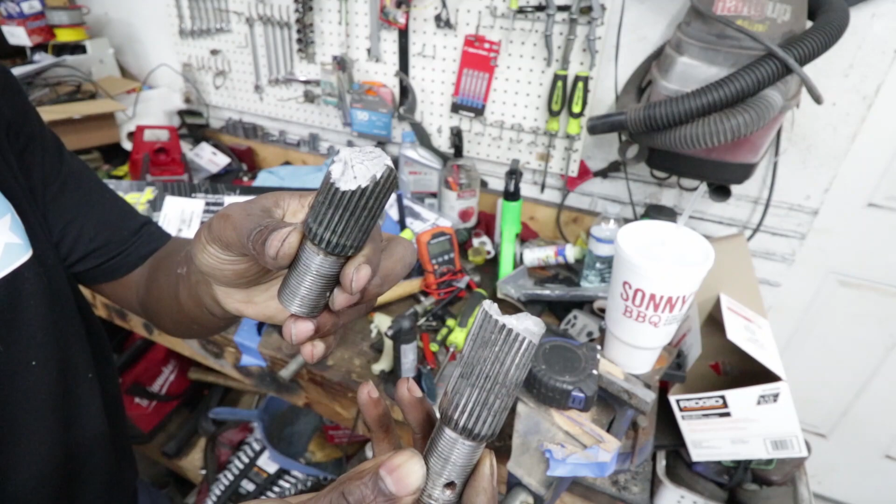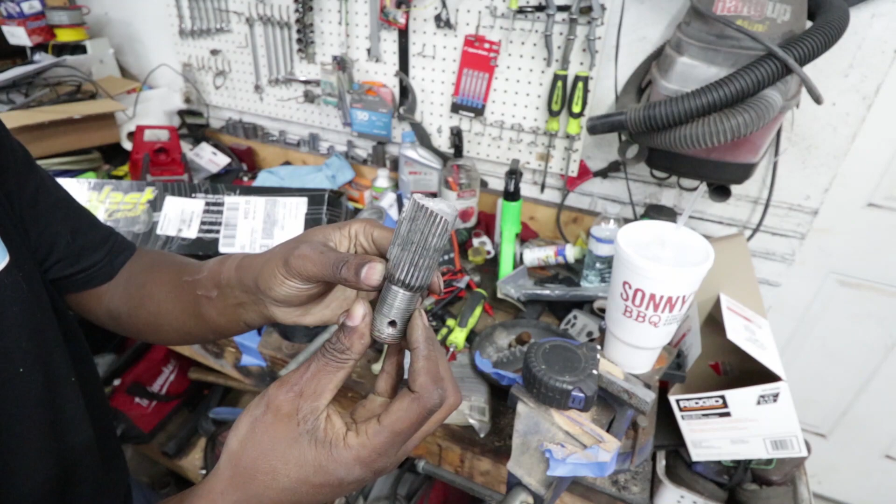So anyways, this is the part of the axle from the last time that broke, and this is the one from this time. You can see they kind of broke almost in the exact same spot as where the damage happened. So it could just be a coincidence, or it could mean there's something kind of funky going on. The one that's in there now is a Duralast AutoZone one, the one that was in there before was from O'Reilly, so maybe there's a difference. I haven't really... so yeah, it's just kind of weird.

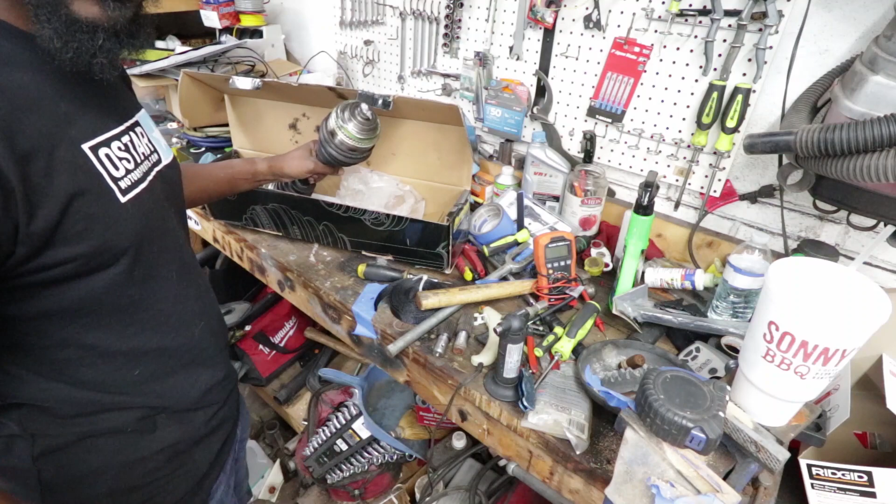Yeah, I came off the clutch a little hard again, but I didn't come off that hard, I didn't pop the clutch. I started letting the clutch out slowly and waiting for it to grab, and rather than starting to grab, it just grabbed and broke. It's done that before, tens of times, and haven't had a problem. The fact that it's basically done this back to back, with two different sets of slicks, is kind of weird.

The only other thing I can think of is the new two-step with the Fueltech is fairly spicy. So before, where it just would have bogged, maybe now it's at that point where it's making enough power that it just breaks stuff. I don't know what to do about that, but I'm going to do some investigating, check some clearances and whatnot, and see if there's something weird going on with where that axle meets the hub. Anyways, here's some track runs.

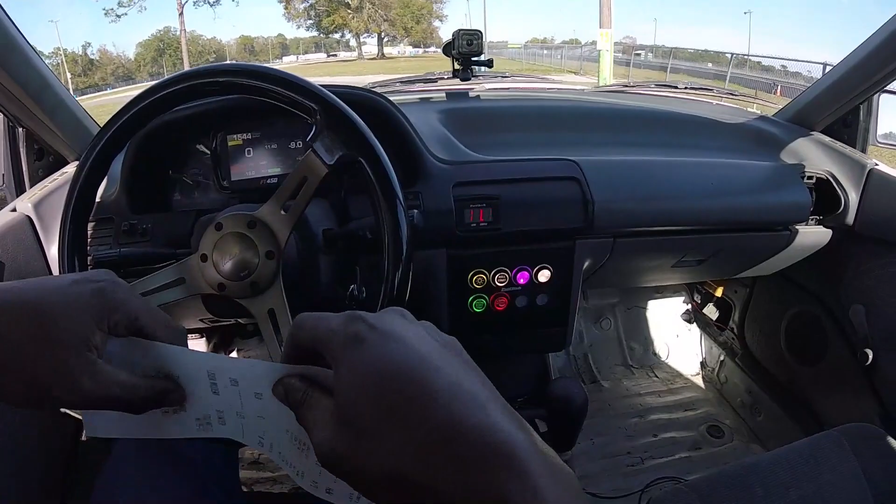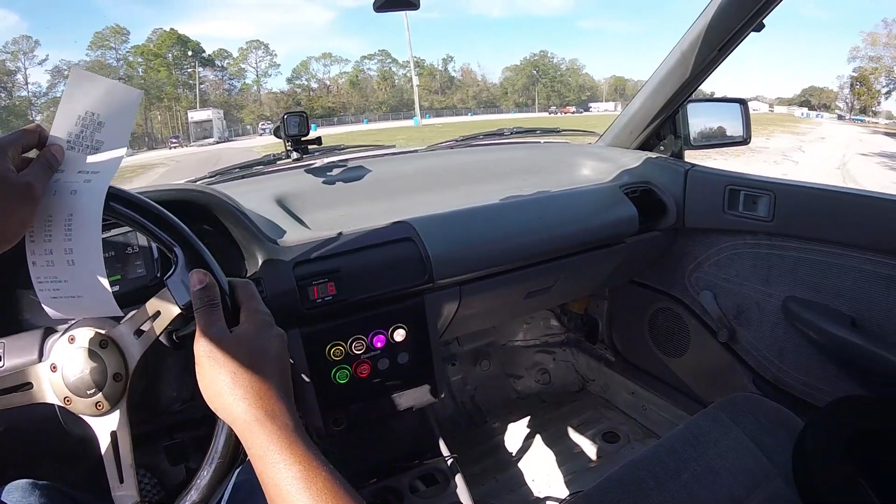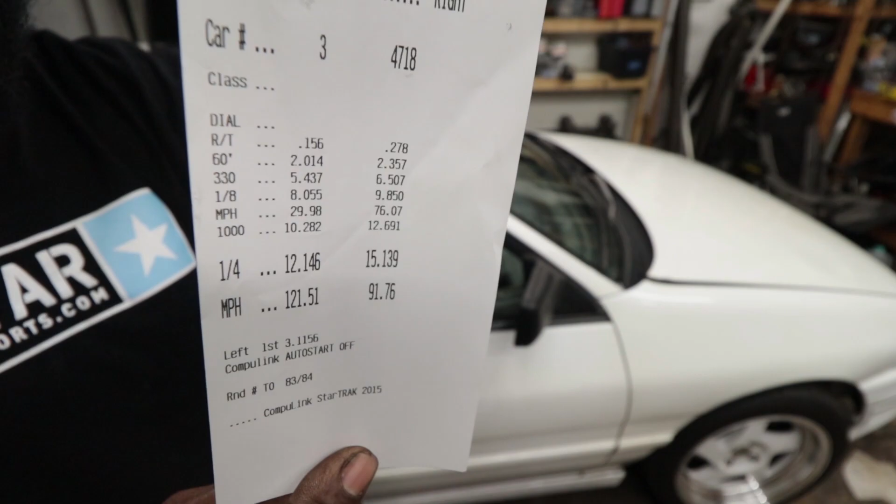Yeah, so first pass: 12.1 at 121, 60 foot was, basically everything about the run was kind of cruddy. 60 foot was kind of horrible, 2.0 60 foot. I tried slipping the clutch really hard, and I think I just kind of creeped through the beams, and then it bogged. So that was just whatever. 2.0 60 foot, 8s in the eighth, pretty cruddy. I don't know what the eighth mile speed is because something's wrong with the Speedworld timing system right now, it's showing 29, so I don't know what that's supposed to be. Maybe it's 69, maybe it's 79, I don't know. Definitely wasn't 29, but that's what it shows.

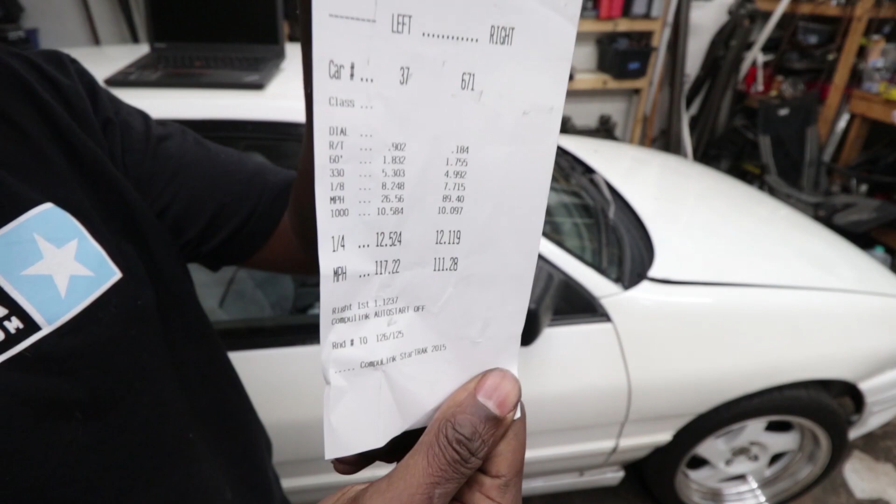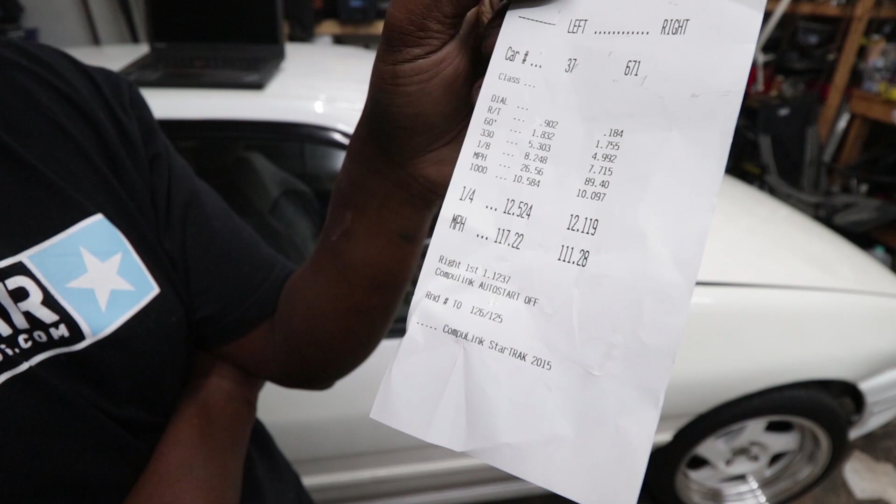Alright, so the second run: 12.5. It's always great when things get better. Better 60 foot, 1.8 60 foot. And then I missed third, or I missed fourth, I can't remember, I missed a gear. I'll have to rewatch the video, I'll put whatever gear it was I missed. Pretty sure it was third gear that I missed. So yeah, that kind of screwed that whole run up. That probably would have been a decent run, probably at least a 11 had I not missed a gear. So, yay.

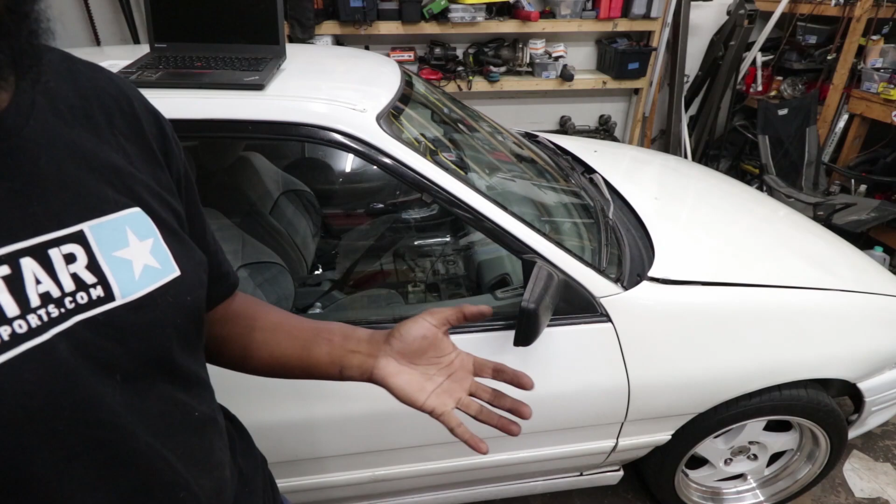So the third run, this is where I snapped the axle again. I should have filmed it, I don't know why I didn't, but I swapped the axle while I was at the track. So this third run isn't really a run, snapped the axle again, came off the clutch a little too hard I'm guessing, though I don't feel like I came off it all that hard. But anyways, I guess I came off the clutch too hard and it snapped another axle. It was kind of weird because I felt it spin and start to go and then it broke.

So I feel like maybe I'm shocking the system a little bit, but I also don't know what to really think right now as far as why the axle keeps breaking when it didn't used to be an issue before. Even if I just sidestep the clutch, it would just spin the tires as opposed to breaking stuff. So I gotta figure that out.

But anyways, I ended up just fixing the car basically right there in the staging lanes. They just pushed me back against the wall, and I went and pulled my truck around, grabbed my tools, jacked her up, and had the axle swapped out in like 30 minutes. And then I ran again.

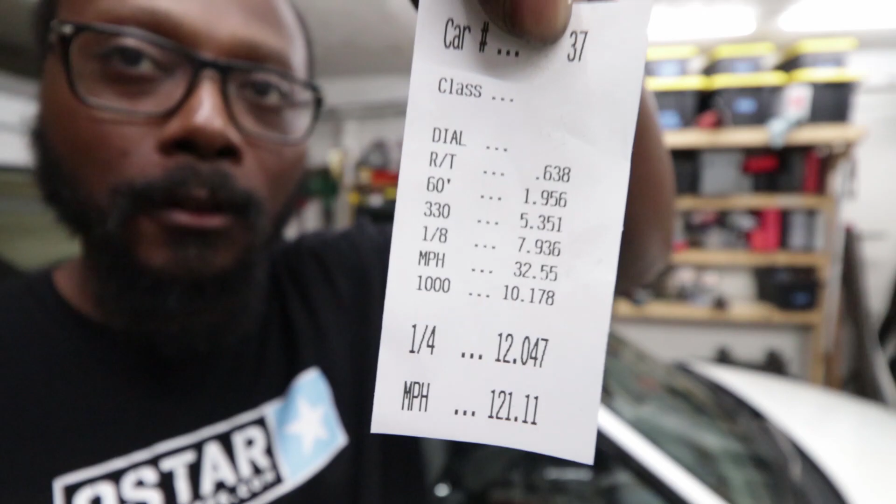Apparently their printer was malfunctioning or something, and so this is what the remainder of the day's time slips look like - these little tiny time slips.

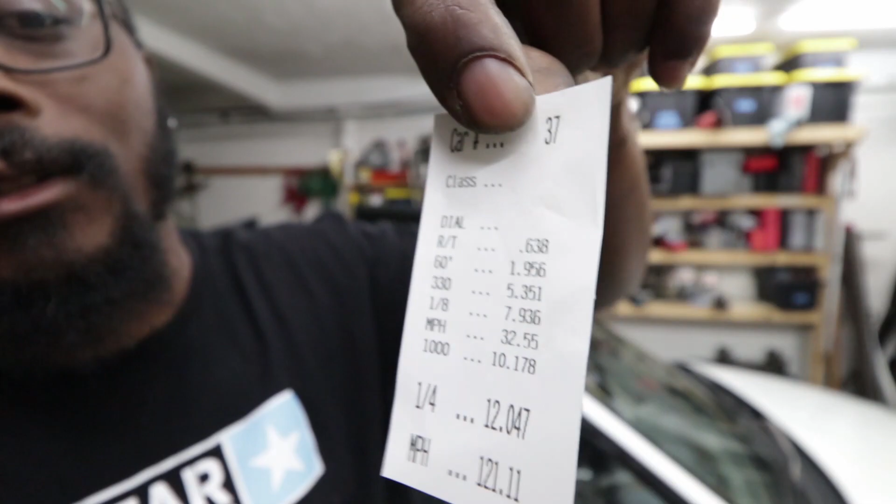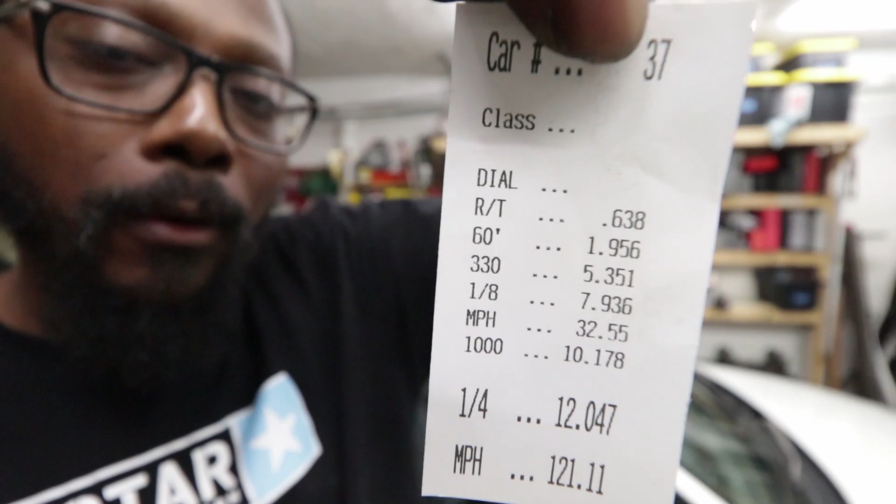So last run was a 12.0 at 121, 1.9 to the 60, like 7.9 or something in the eighth - I can't remember because I can't see it. Not a great run, but I guess it was a good A to B pass, considering new ECU, new wheels. And I'm just still trying to figure everything out. That's the main thing.

Not only is it a new ECU with a whole new map, so the timing table is completely different and the car is making power where it didn't used to make power, and it's two steps hotter, but I also put bigger wheels on. So now the launch that I had perfected with the small slicks, I've got to figure out where the new slicks need to be launched at, because the old slicks were 5700-5800 RPM, no boost on the two-step, because they're so skinny you don't need a whole lot of power to spin them, so they would basically spin and then hook and then go.

With the new ones, they definitely don't spin quite as easy. I think I need to dial back power off the initial hit and then dial power back in to get them to spin. But anyways, next time I go to the track - I think the last run was launching at 6,000 RPM, and that was decent - so I think I'll up it to like 6,300 and see what happens.

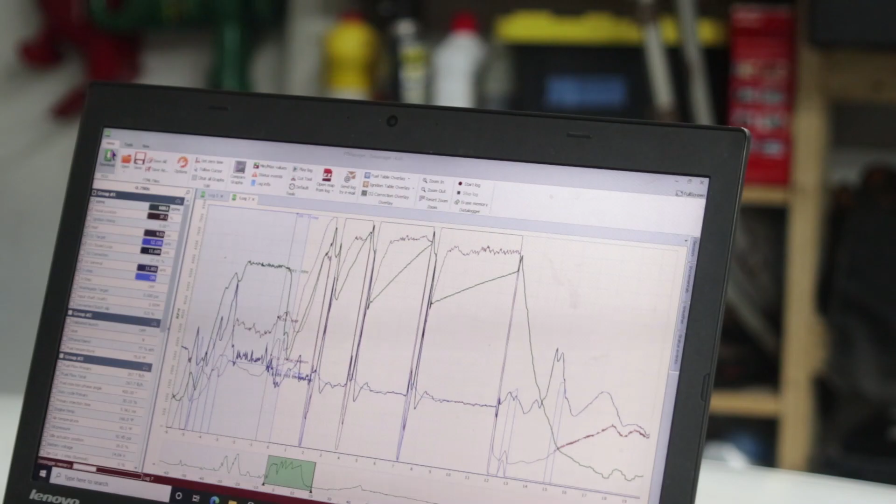That would be an interesting one to look at. Alright, so this is the last run, let me see if I can pull the log from where I broke it.

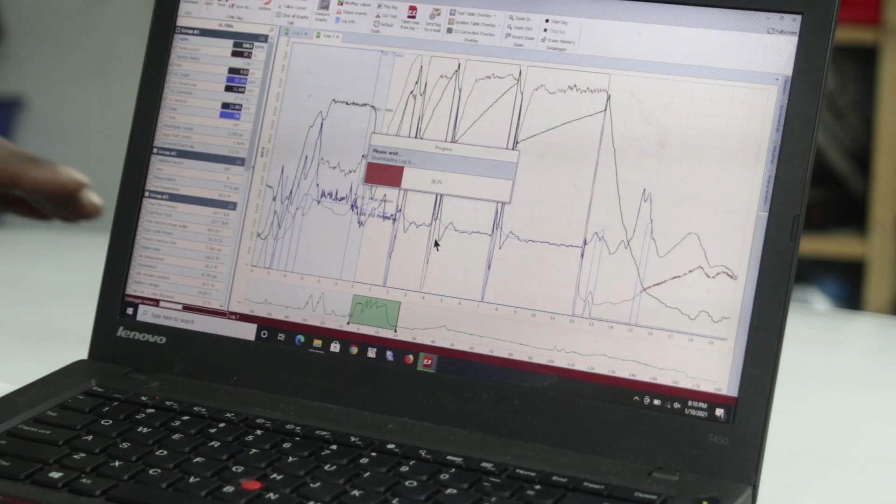Something I like about the new unit, about FuelTech - here's one of the nice things: even when the car's not on, you don't have to apply power to the unit to pull logs from it. It will be powered by USB, so whenever you plug the unit into a laptop it comes to life, and then you can pull logs off of it, or adjust the tune and do all that type of fun stuff without it being powered on. You can basically pull it out of the box, plug the USB in, and turn the thing on.

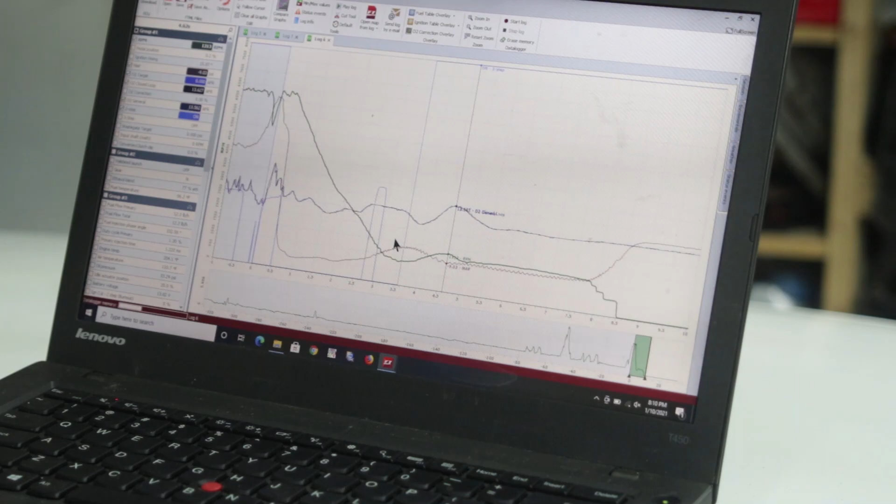So this was the broken axle. Basically there's time-based stuff activated in this - what it does is pull timing and activate a secondary rev limiter after the launch. So once you have a validated launch, when you pull up the log you'll have this blue area, which is basically like a T0 kind of thing.

This is basically like your countdown, all this blue stuff. This is leading up to 0, up to the point where you launch, and then everything is 1, 2, 3, it's seconds after the validated launch. So you can have like 1 second in, have it pull timing, or have it pull timing for 1 second after the launch.

So that's one of the nice things about time-based tuning. Anyways, like I said, this blue area is everything before the launch.

Yeah, it's only like half throttle. It's making like 9 psi, 10 psi, 13 psi. Yikes-a-rooney. Alright, so that might be why I snapped an axle. Maybe I'm just leaving it a little too spicy, because there's almost 20 psi.

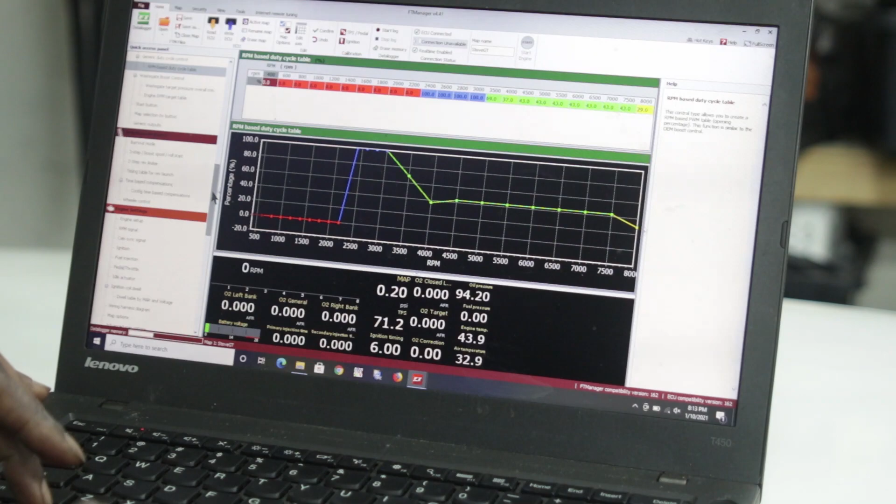Anyways, this is a FuelTech manager, or FT manager. This is the log version, the data log version. This is actual FT manager. You've got all your fuel table and your spark table, your familiar kind of stuff, that nice 3D.

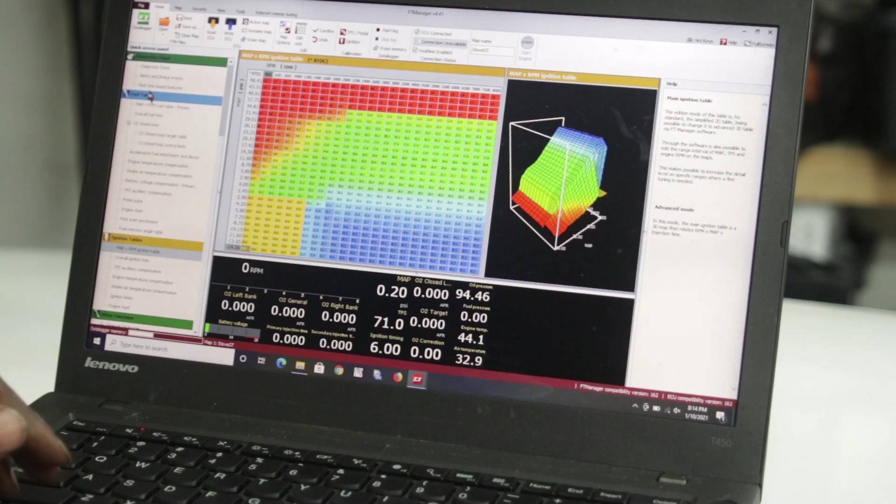But then you've got this whole side over here. This is every feature, every nook and cranny, everything that can be adjusted. Closed loop, O2 control, just basically everything. Acceleration enrichment, intake temperature compensation, just all types of stuff.

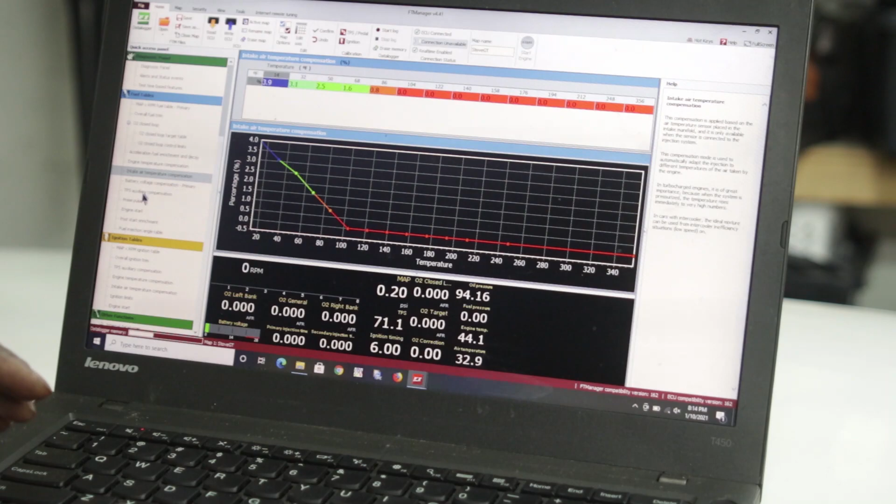But anyways, what we're looking at right now is the logs. I'm not a fan of the way everything is kind of layered over everything. I kind of prefer Megalog Viewer, where you can select bar, and maybe you can do that in this, I just haven't figured it out yet.

But I like being able to have one section that's just the items I want, and then having multiple sections with specific items, so that way I can group things together and very easily look at it, as opposed to having basically everything all there.

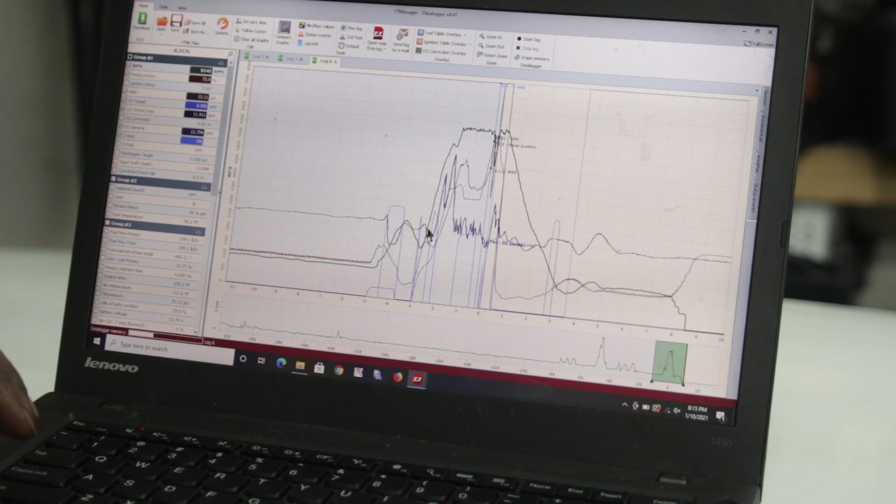But yeah, other than that, everything seems to be working great.

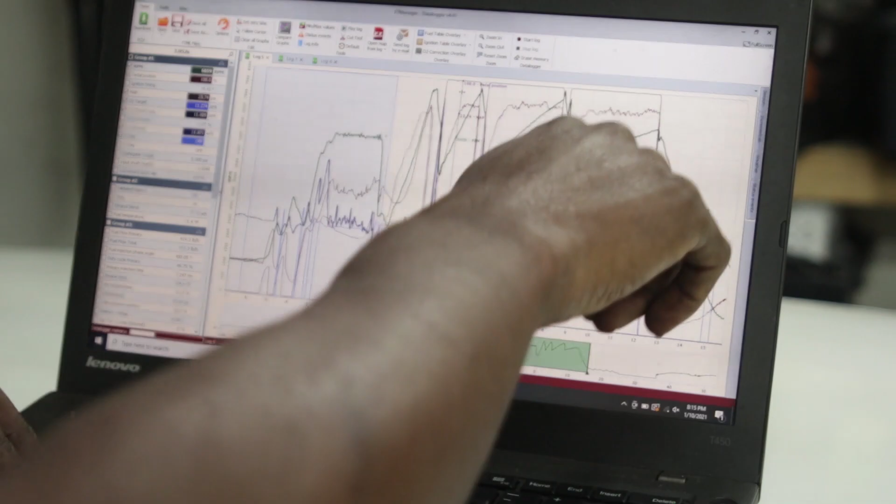The square looking traces, that's pedal position. This is boost or map. Green line is RPM. Once again, like I was saying, everything before the launch is a negative number, and then once the car starts moving and you have a validated launch, you can see RPM here was capped at- actually no, it went all the way up to 7.

But anyways, this was the second run- or this is the first run. This is the first run. The second run I didn't actually catch, but yeah, everything's good.

AFR- so the skinny blue line is AFR target, and the jagged line is actual AFR. I need to kind of fix this little area where it goes super lean, or it goes super rich here, and then it comes back up. But for the most part, it's pretty much on target for what the AFR should be.

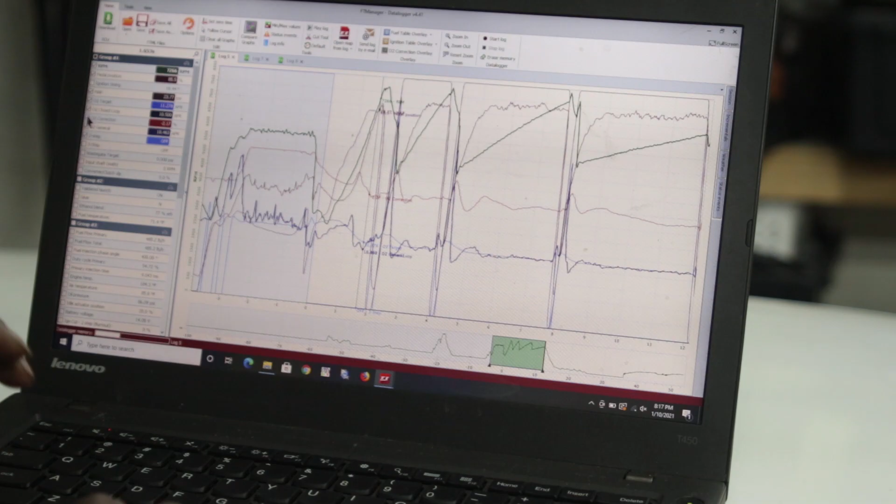And I'm using the closed loop compensation for the O2, so I've tuned it to get it as close as I can, but it doesn't need to be super- I mean, it's pretty precise. As far as target AFR, as long as the closed loop compensation is less than 3, I'm considering that pretty good.

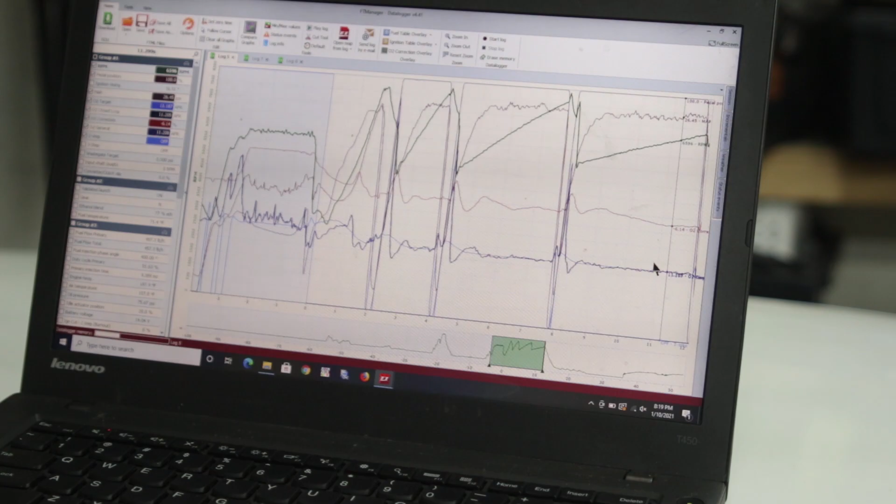Anyways, I'll mess with this later and fine tune that and just get it closer. Boost is about where I want it. I mean, I could go for another pound.

I don't know, maybe I should turn on smoothing. You can see the boost line is super jagged, because it has such a high sampling rate that it's catching every little fluctuation. So I almost wish it was just an average. But yeah, it's somewhere around 26-27 psi.

I probably need to add a little more duty cycle to the beginning of the gear, because it's not quite- it's like 25. So yeah, it'd be nice if it was 27 the whole way across. But all things that I'll know to adjust next time.

The last run was about 27, about 26, 27 psi.

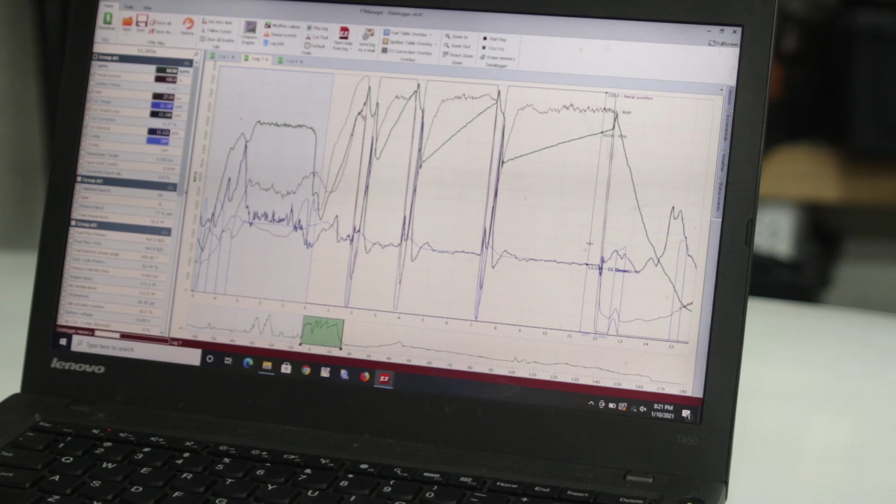But anyways, that was all kind of pointless. Anyways, logs look good, car seems to be running fine. I think I just need to really work on getting that launch down again, and then once the launch is figured out, I can apply more power and hopefully break my record, and not break more axles. So, anyways, till next time.